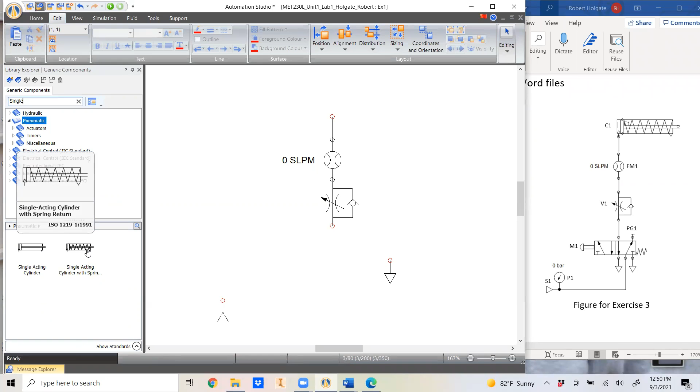And what if I do want a different strength on that spring? If I double click on this cylinder, I can change the spring stiffness, K. So I can just click here and I can up it to maybe 5,000 newtons per meter spring stiffness. Then just hit enter and come out of the builder. So I just made my spring stronger there. That means it's harder for the air to extend the cylinder.

And I have a flow meter just like before, variable throttle, we've seen that before, but now we need this one. It has 1, 2, 3, 4, 5 ports in a box and 2 positions. So it's a 5/2 valve, 5-port, 2-position. I'm in pneumatics, directional control valves. I've got some 5/2-way valves, 2 different types, but neither of them has the manual push button, but this one has a spring return, so it's closer. So let's pull it in.

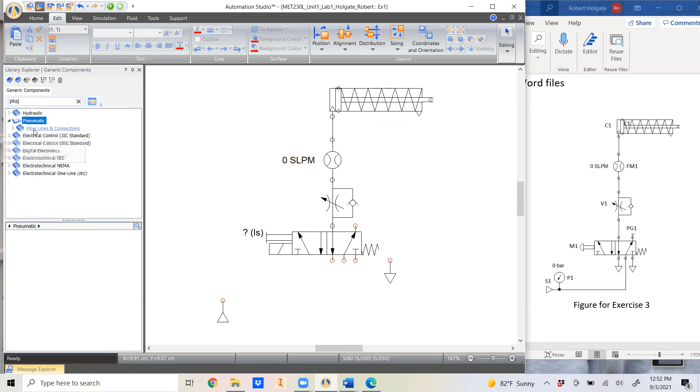And we're connecting to that port. And it looks like we need a PG1. This is a plug on that port. So let's type in plug on the search menu. Let's click on pneumatics and flow lines. Looks like there's a plug there. It's really small, but yep, that looks the same, but it's upside down.

Again, let's go to edit up here and go to position. Oh, we need to select this guy. Escape, select him. Let's go to position. Let's rotate it 90 degrees twice. There we go. And then we can pull it. And we can even just make a line there, leave it there. That's fine. Then we have some exhaust lines just like before.

And if I hold control and select it, so I hold control down, I hover over the part and then I left click on it and drag to the side, and it copies it. So I can use that to copy parts that are on the screen.

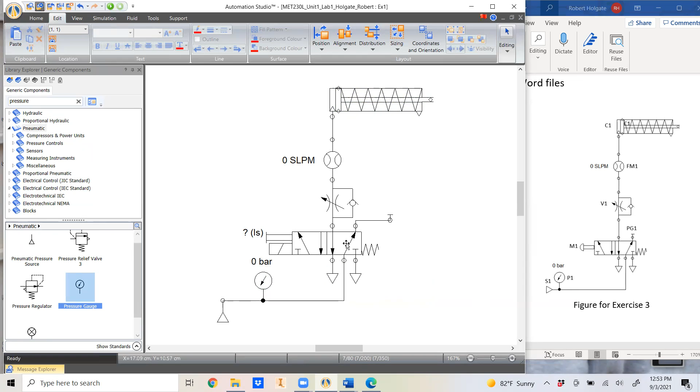And I almost forgot, we need to change the settings on this 5/2-way valve. So we need a manual button on the left, a momentary button. And let's check our port. So it's plugged across from the center to the top left down. So that box looks correct. The right box looks the same as our diagram. If they're not the same, it won't work correctly. We also need to check our flow here. Our check ball has the seat, this angled part on the top, just like the diagram.

Let's change this device, technical specs. We want a momentary button. So let's just delete that one. So I just clicked it and then I hit the delete button on the keyboard. Then let's double click this, and it's not a pull button, but a push button. Push button on the left, spring return on the right. Looks good. Hit the check mark. Let's get out of that view. Now I have it correct. I have a single acting cylinder, all the pieces in place.

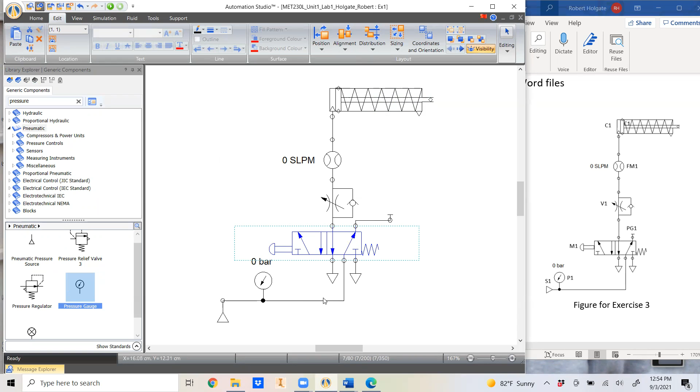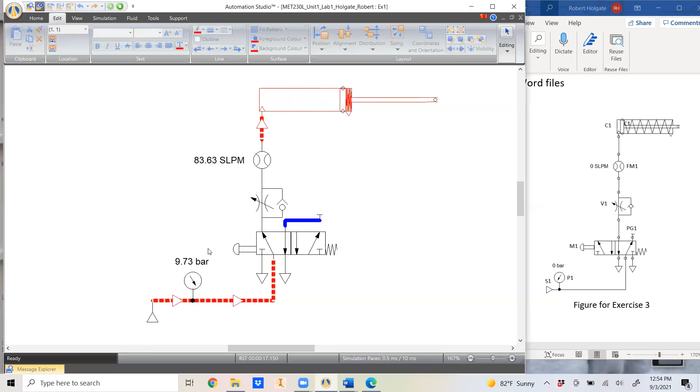Let's hit play, make sure it works. And this is a momentary button, so I have to hold it down. I hold it down and the cylinder extends. It gives me the pressure, 10 bar, and gives me the flow as it's flowing through the flow meter. If I let go, it comes back, it returns.

Now, in Automation Studio, you can click directly on the boxes here if I need it to hold it down and not have my mouse hold it. That's not changing the fact that it's a momentary button, but maybe I need to have other buttons I need to click in my simulation as I practice, as I build this circuit. And so this check mark is showing me that it's being held down right now, even though, remember, it's momentary. If I want to release that function, I go to the button and I click on the button.